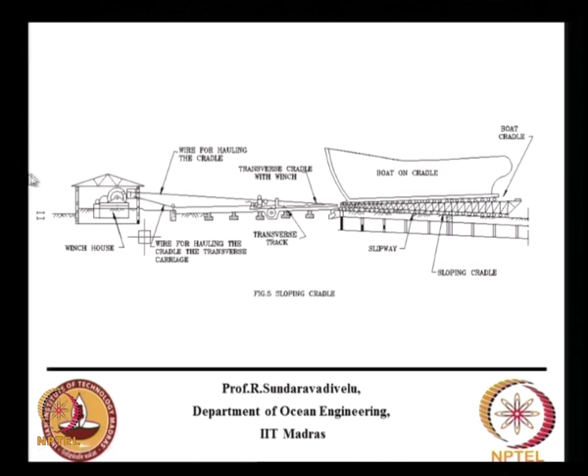Then we have a boat which is sitting on the cradle which will be pulled by winches from a winch house, and then it will be kept here, so from here it will either be transversed or kept at the same place for repair or maintenance. Sometimes they build the ship here then push it down like this.

Definition of slipway: this is also known as a marine railway. They are structures where floating vessels are hauled up for hull repairs. The slope varies from 1 in 12 to 1 in 24. So the slope is very important. A steeper slope means the hauling power required will be higher; a flatter slope means the distance required into the water is larger, that is the length of the slipway.

This is generally about 2.5 times the length of the largest vessel that is to be hauled. There are 2 types of slipways: end haul pattern and broadside or side haul pattern. In the end haul pattern, the ship is hauled lengthwise like this. In side haul, the ship is positioned sideways and hauled like this.

Similarly for ship lift also you will have an end ship lift, meaning they will raise the ship like this and then push it here, that is end haul. The broadside means they will lift the ship like this and then shift it like this. So both options are there in ship lift also, but the most commonly used is the end haul pattern.

This moves the ship lengthwise. A very elaborate carriage is required for an end on slipway. The vessel is required to be maintained in a level position. The carriage means nothing but the cradle.

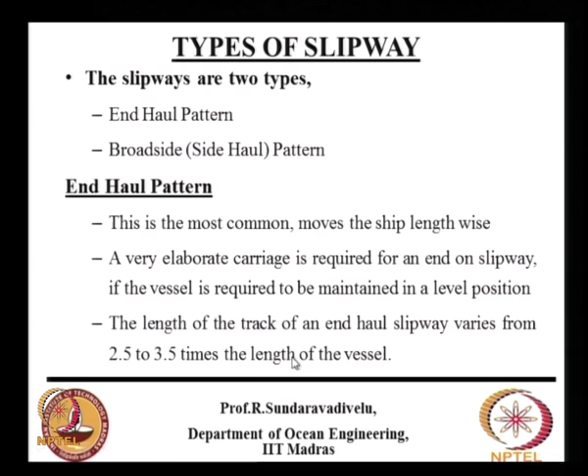The length of the track of an end haul slipway varies from 2.5 to 3.5 times the length of the vessel, that is the length required. The length required is higher because for one length of the vessel the ship will be in water, and for another length it will be on land, that is why we need a minimum of twice the length.

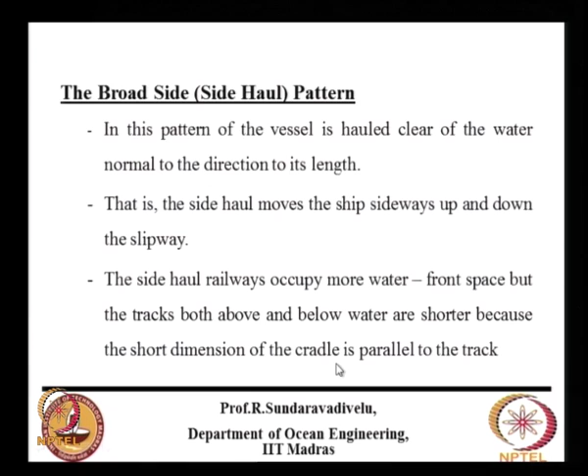In the broadside pattern, the vessel is hauled clear of water normal to the direction of its length, that is for the side haul it moves the ship sideways up and down the slipway. The side haul railways occupy more water front space, but the tracks both above and below water are shorter because the short dimension of the cradle is parallel to the track, that is the cradle width will be lesser.

The components of the slipway are these three main components: one is a sloping concrete platform, there is a cradle and roller, and then there is hauling machinery. These are the three main components for a slipway.

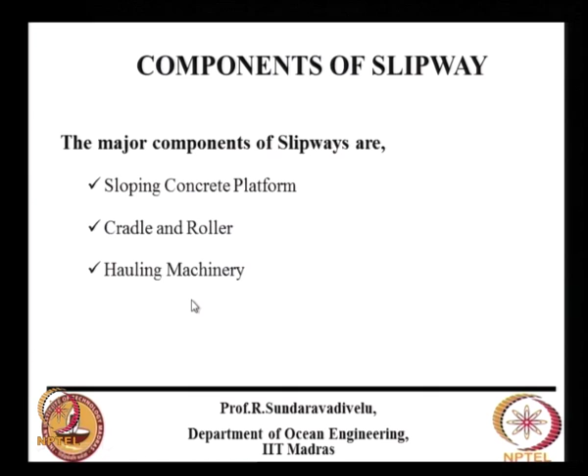This sloping platform supports the tracks on which the cradle travels. The track must extend sufficiently far into the water to permit the ship to float over the keel blocks on the cradle, and sufficiently far inshore to lift the ship entirely clear at high tide. That is, one ship length of slipway platform is required where the ship will float, but another length is required where the ship will rest on keel block and bilge block.

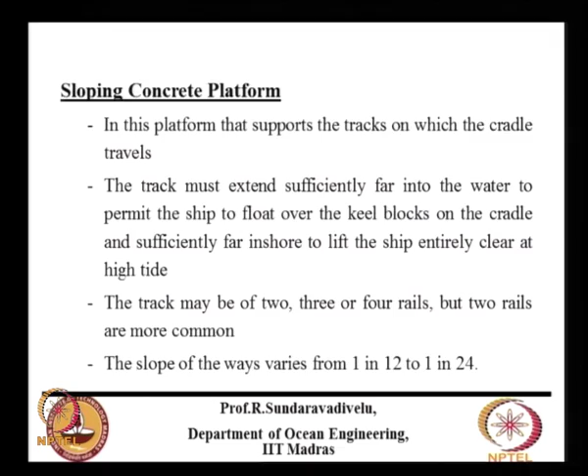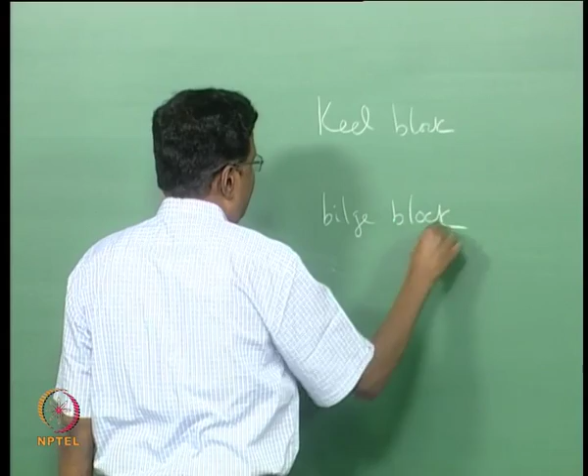We have two types of blocks which are used. One is called a keel block, another is called a bilge block. These are the two types of blocks that are required. Then we need what is known as a docking plan. These are the requirements for any slipway or dry dock or ship lift or floating dock. These are the three main requirements.

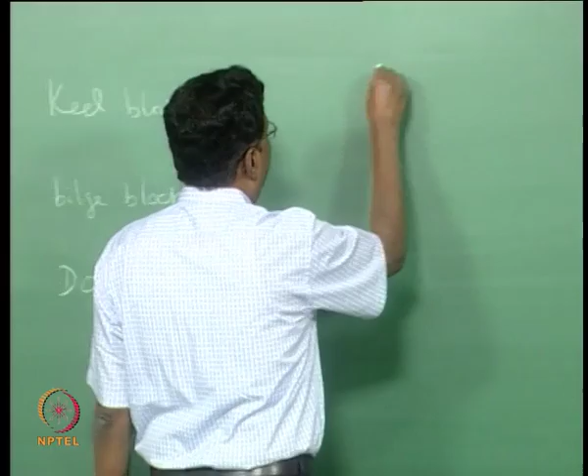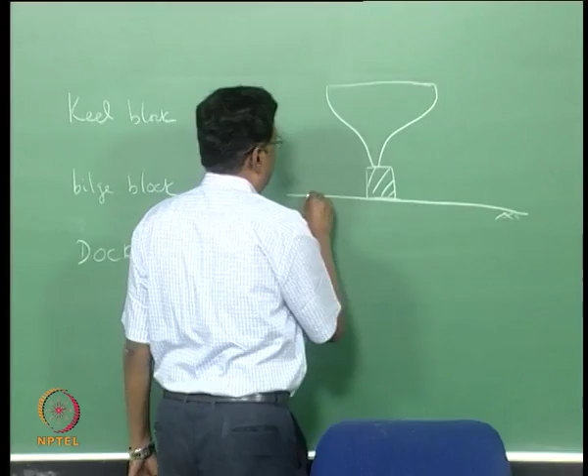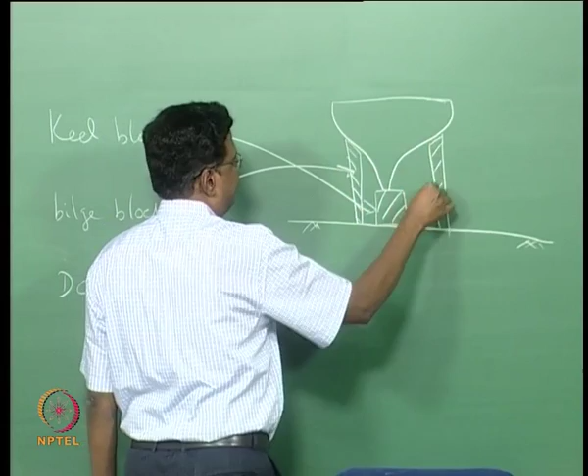Keel blocks and bilge blocks are something like this. So, when you have a block here to support the ship on the dock floor, this is called a keel block. The bilge blocks are to support the vessel at the sides, this is called a bilge block. This is a ship which has to be resting on the dry dock floor.

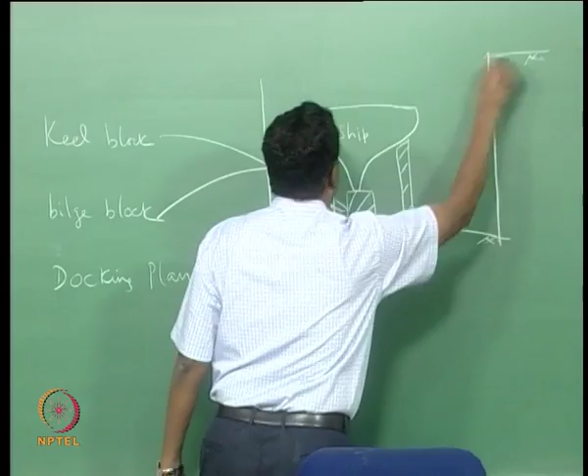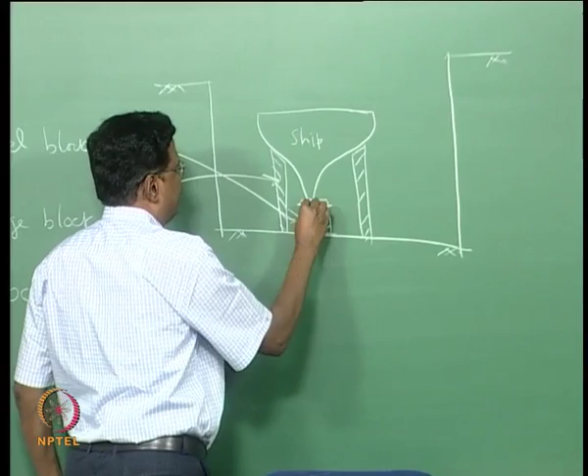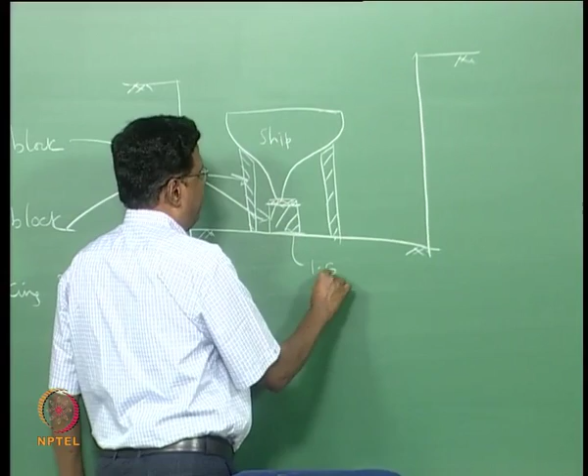If it is a dry dock or ship lift system, the systems will vary. Generally the ship will be resting on the dry dock; this will be the top level of the dry dock, this will be the bed level. You will have a keel block, it may be made of concrete, but generally you will have some wooden strips on top of this. Then to support the vessel at the sides we will have the bilge block. Docking plan means in the plan at what locations these keel blocks will be kept. The height of the keel block is generally about 1.5 meters, and these will be placed, depending on the size of the ship, maybe at 10 meters center to center or 5 meters center to center.

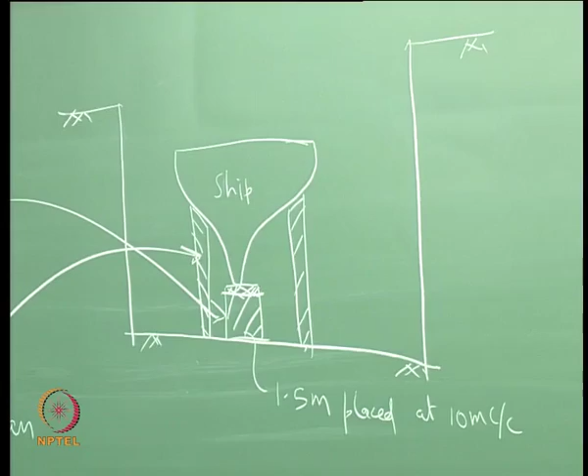We have been approached for one project to bring a used submarine near Mahabalipuram. Most probably it will be done in March or April. They will be spending about 2 crores or so. At that time, if it is convenient, I will take you there. They will bring the submarine from the sea to the land. It is there in Visakhapatnam. The Tamil Nadu Tourism Department wants to do a similar thing in Mahabalipuram, for which we are designing certain aspects. So, there also the docking plan is required. There they want to support at every 10 meters center to center. It varies from ship to ship; it is not at equal spacing, it will be at different spacing.

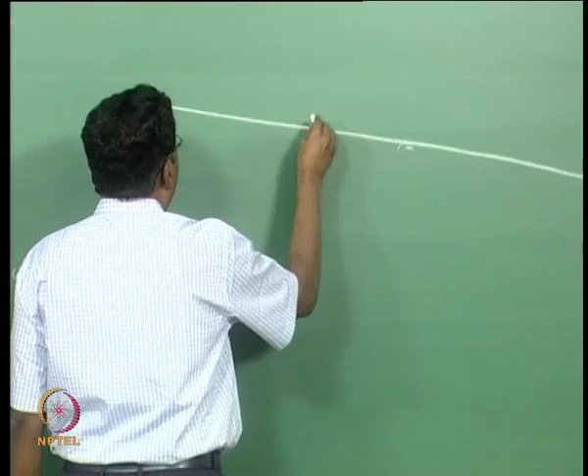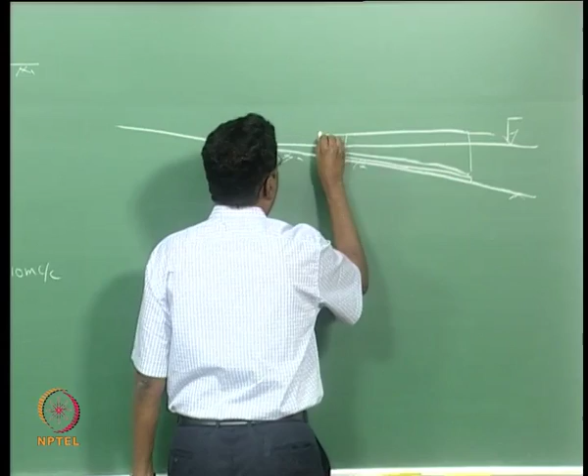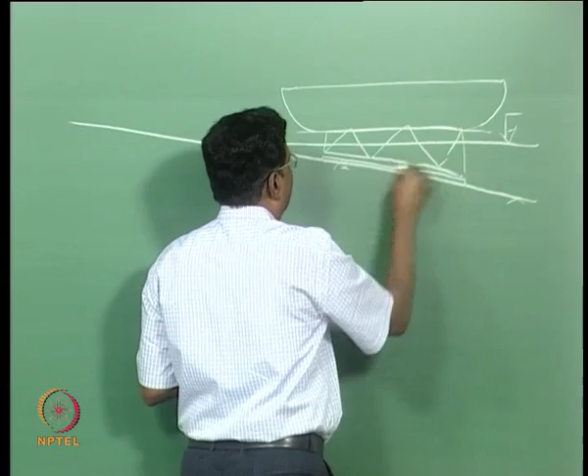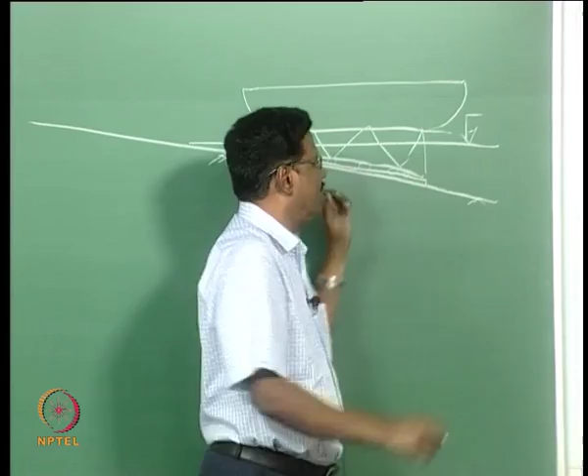The slope we are discussing: suppose this is your slope of the platform and this is your water level, then on top of this we will have a rail, over which you will have the cradle, and on top of it you will have the ship. So, the cradle has to move down; this is one position of the cradle, and it will be moving over rails like this. The ship will be somewhere far away from here where it will be floating. At that time they will lower the cradle, then ballast the ship onto the cradle, then they will push the cradle clear of water. This length goes further down like this, and you may have some piles supporting this sloping concrete platform.

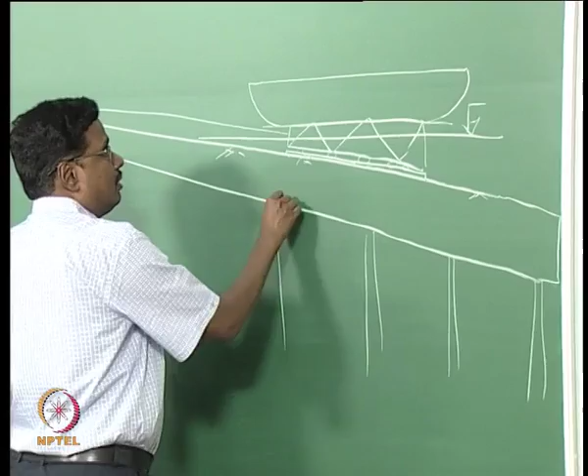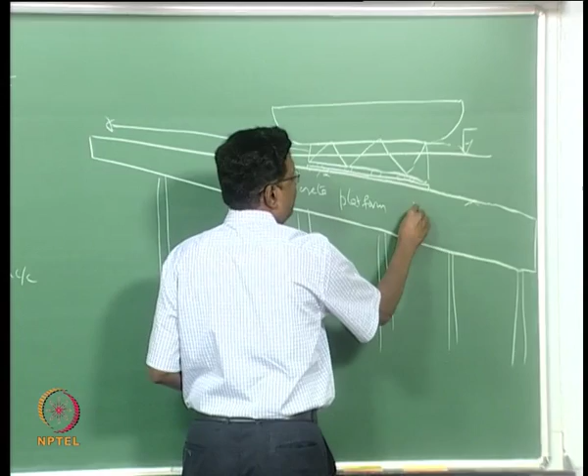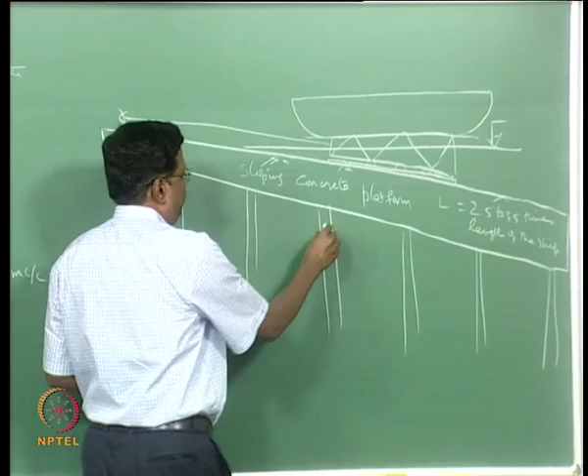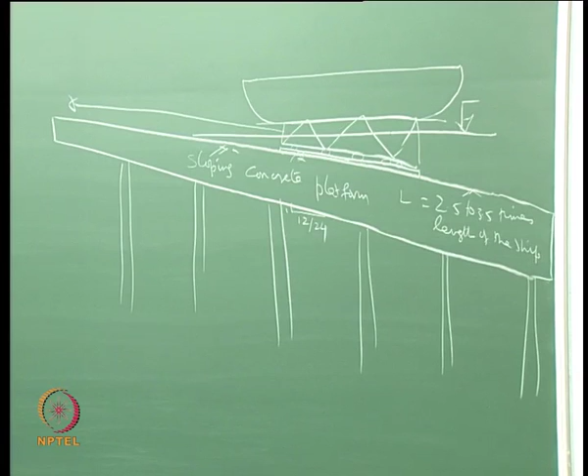So, this length should be 2 to 2.5 to 3.5 times the length of the ship. And this slope will vary from 1 in 12 to 1 in 24. The rails we are placing can be 2, 3 or 4 rails, minimum 2, sometimes they will have 4 rails also, over which the cradle will move. The cradle is a steel structure which supports this platform. There are different types of cradle.

There are different types of slopes: one is inclined side slipping, another is on an acute vertical curve, the third one is on a flat curve. Then we will have a cradle and trolley system, synchro lift we will discuss later, then they will have a tilting bridge, then they will have a transfer track. These are all different types of platform arrangements.

The cradle and roller: this is a framework of timber or iron or keel blocks, but usually consisting keel block is much stronger than the other two. They can have a cradle with the keel block also. The main deck of the cradle provides a working platform for the repairing and painting of the vessel.

So, when they take the ship with the cradle, they will keep the ship in the cradle itself. So, each ship will have a separate cradle. So, they will take it along with the cradle, repair it and then push it down to the sea. So, each ship when they want to repair, they will have a specific cradle for that.

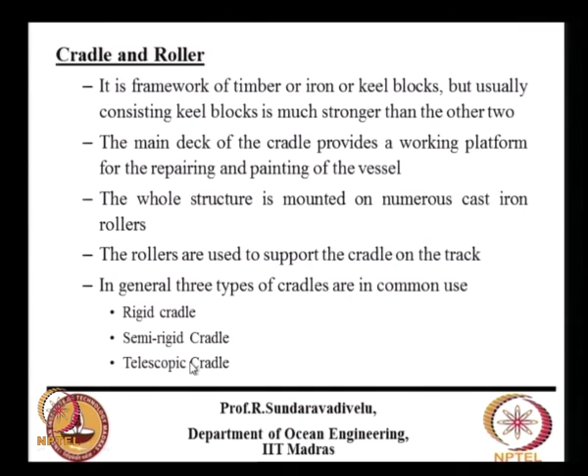The structure is mounted on numerous cast iron rollers. The rollers are used to support the cradle on the track. There are 3 types of cradle: one is a rigid cradle, semi rigid and telescopic. Semi rigid means it is flexible, telescopic means they will increase the length of the cradle depending on the length of the vessel.

This shows a conventional ship repair. This is not a ship, this is for a floating vessel. This is in a place called Dhamra in Orissa. So, here you are seeing the 2 rails, I think these are the 2 rails, this is another structure, this is what I am talking about, the cradle, this is the keel portion of the vessel. They will be pushing; this is a very simple structure because this is a very small boat facility.

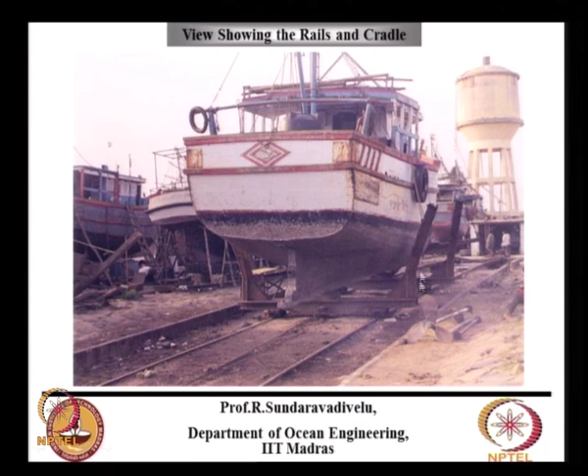The hauling machinery consists of wire rope drums or chain sprockets, endless chain running over a number of sheaves and the operating motor with a gear train. Then we also use electrically driven variable speed gear comprising of a pump and a hydraulic motor with oil as a medium. Side haul railway have one chain or rope for each section of the cradle. When you do a side haul railway, there will be many cradles because the length of the ship is more, each one will have a separate hauling system.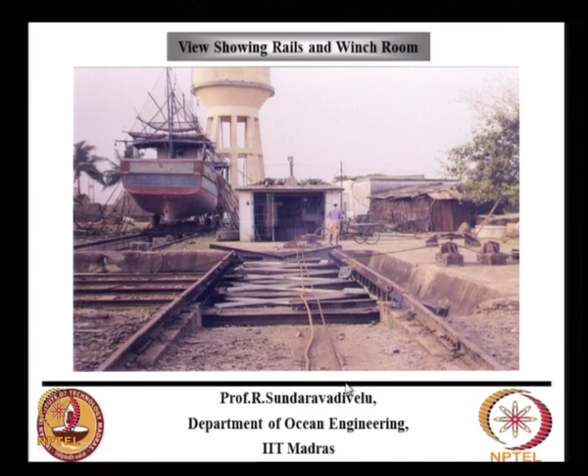I have a video showing the ship lift where these operations are given. This will go to the other end below the water where they will be doing this. This is one typical system where the transfer cradle is used. So, this is the main slipway, this is the river, this is land area, there is a winch house here, they push the vessel here like this, then they transfer it like this right up to the end. We have the tracks on either side of this transfer track and these are called the repair tracks, this they want to do in future.

So, the advantage of this type of thing is you haul the vessel at any time and go to any of these repair tracks. Suppose this vessel is ready, then you bring it here, then push it back like this and then take it here like this. Typically what they do is the wheels will rotate 360 degrees. I will show you in the ship lift video how they are shifting, then only you can transfer it like this.

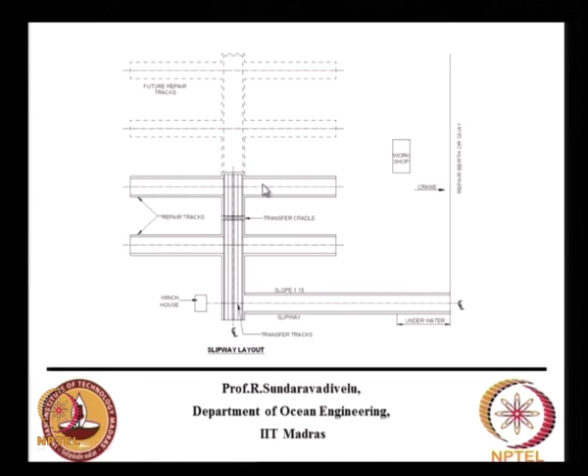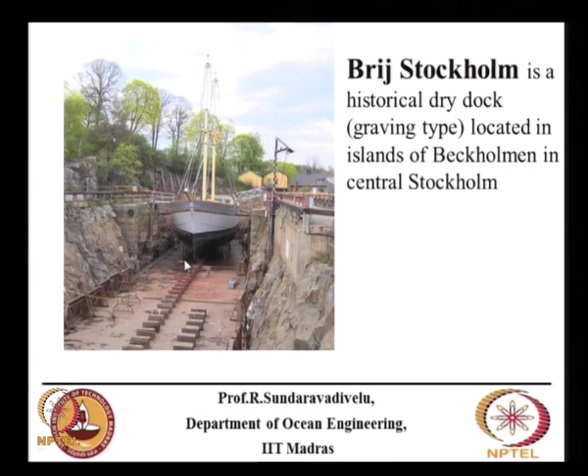So once they close the gate, then pump the water inside, keep the water level same, then they remove the gate and then take the vessel out. When they bring the vessel in, they close the gate, pump the water out. So a gate is required for a dry dock. The narrow basin or vessel is flooded to allow a load to float inside, then drained to allow the load to come to rest on a dry platform. That is, first allow the vessel inside with water inside, then remove the water.

This can be used for construction, maintenance and repair of ships, boats and other watercraft. There is a regulation that once in 5 years the under keel of the ship has to be checked. For that reason we have to dry dock the vessel once in 5 years and you have to do some coating, anti-corrosive and anti-biofouling coating. If the biofouling is there, the ship resistance will be higher, fuel consumption will be very high, that is why we have to remove the marine biofouling also.

Sometimes for construction of bridges, dams and other large objects we use the dry dock. At present there is a construction going on of a seawater intake well for the Hinduja project at Vizag, for which the intake well is built inside a dry dock, and one of the large dams in the Netherlands they have done in a dry dock.

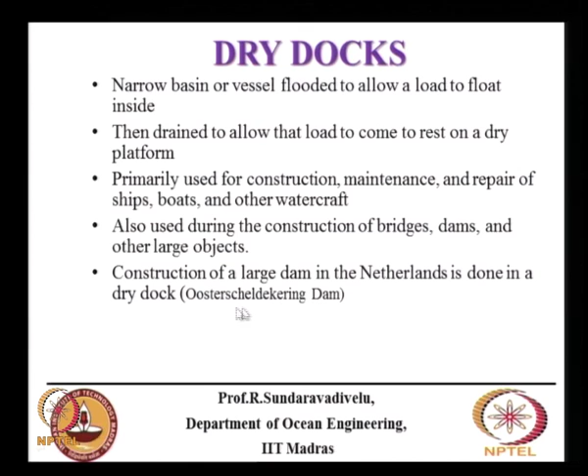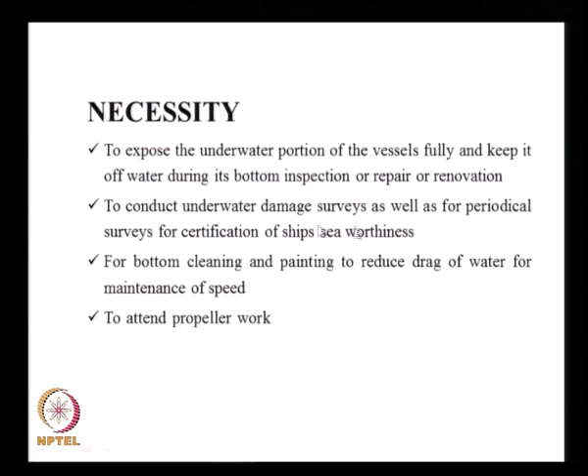What is the necessity for a dry dock? This is to expose the underwater portion of the vessel fully and keep it off water during its bottom inspection or repair or renovation. Sometimes certain renovations are required in the vessel, for that also we have to dry dock. You have to carry out the underwater damage survey, if any damage has taken place, as well as periodical surveys and certification. So we have to certify seaworthiness of the vessel once in 5 years. For bottom cleaning and painting to reduce drag of water, for maintenance of speed, to attend to the propeller work. For these reasons we need the dry dock.

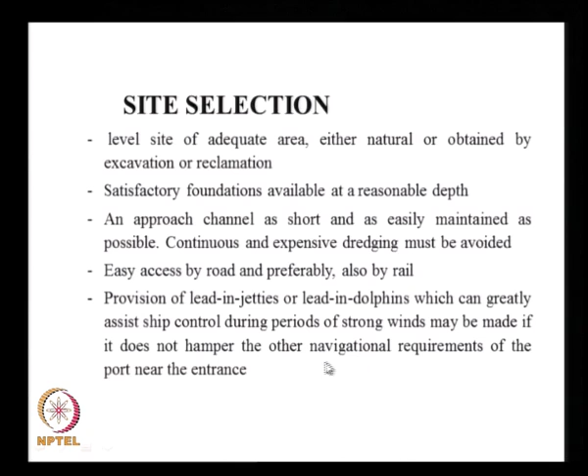So site selection is very important, and satisfactory foundations at reasonable depth should be available. A short approach channel is preferred. Dredging, both capital and maintenance, should be as minimum as possible. There should be easy access to road as well as rail. We have to provide some lead-in jetties, lead-in dolphins, which can greatly assist ship control during periods of strong winds and other navigational requirements. These are the requirements for a dry dock.

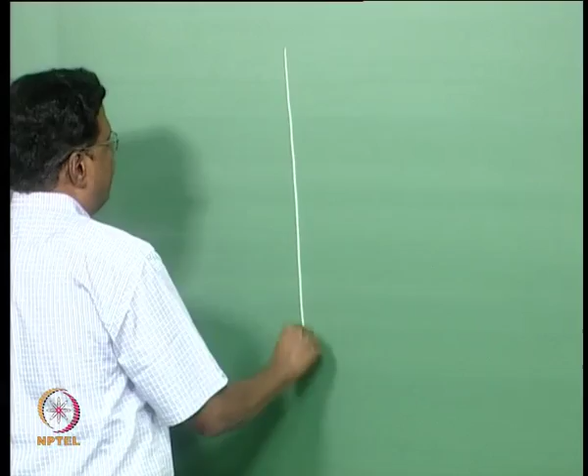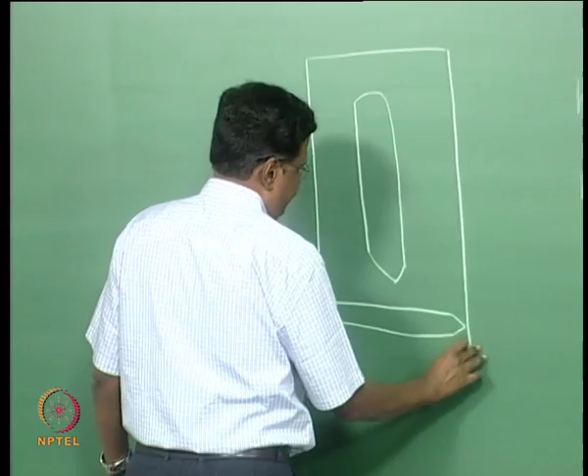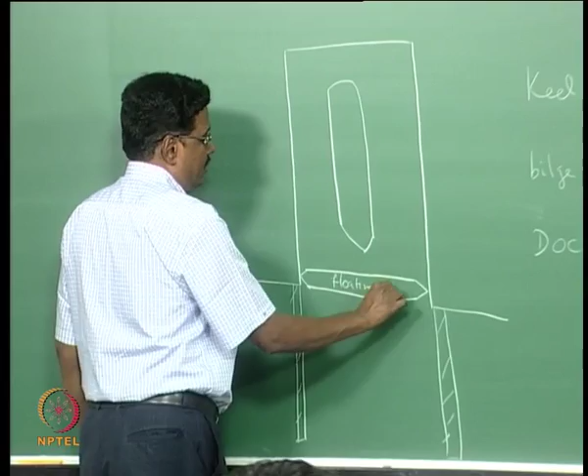I am drawing the plan of the dry dock. So the vessel will be kept here like this. This is the plan of the vessel. Then we have a gate, the gate is like this. What they are asking is a lead-in jetty, there is a jetty here, on both the sides also it will be placed. There are different types of gate, this is called a floating gate. When they ballast, the gate will go and sit here. So this is the cross section, and if you see the longitudinal section,

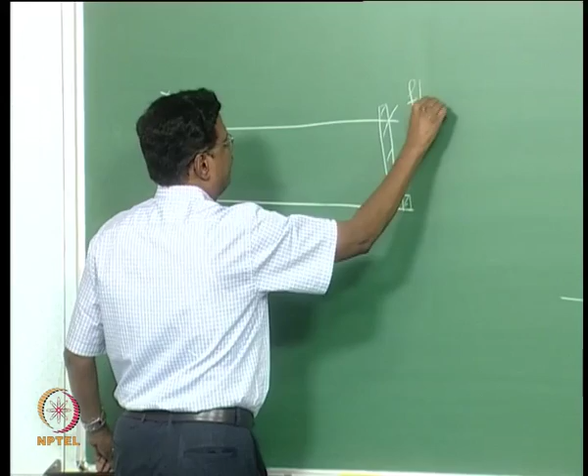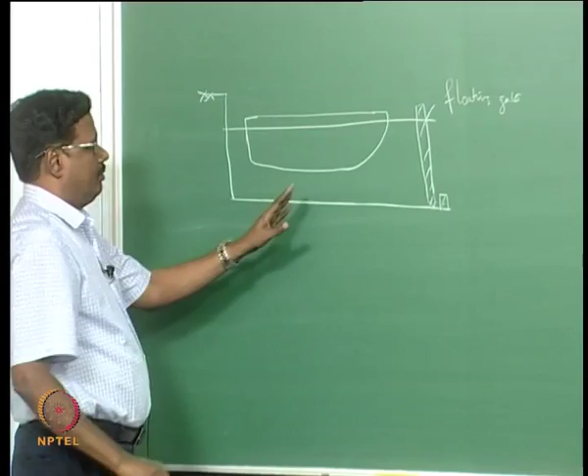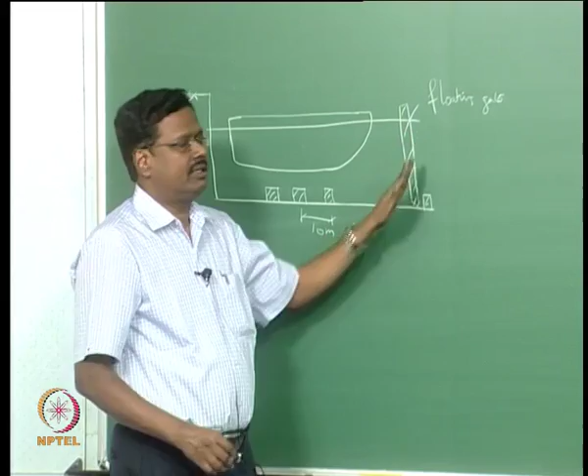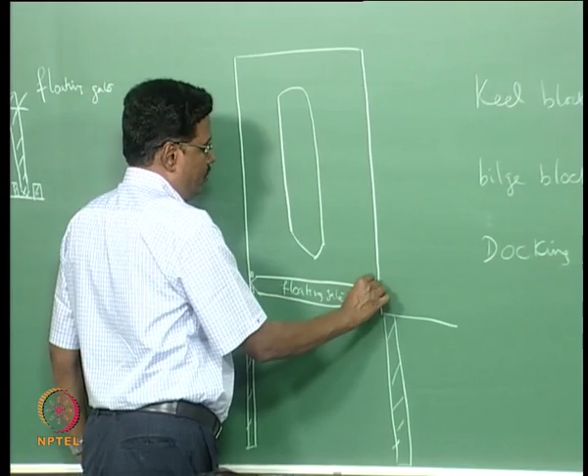So, when the gate is not there, they will bring the vessel inside, then they will position the gate, then they will remove the water, then the vessel will go and rest on the keel blocks. These keel blocks, I said the typical spacing will be about 10 meter in this direction. So this will rest here, they will remove the water. This floating gate will have end grooves here where it will go and rest, so the gate will not move outside. There will be a pressure from this side when the dock is empty. You have to design for this.

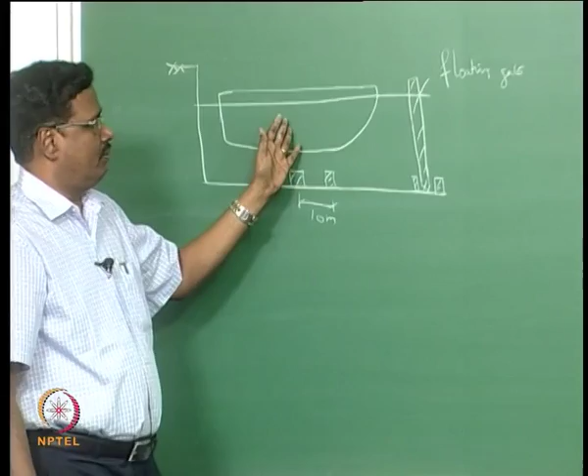Once the repair is over, then they will allow the water inside. There will be some valves here which they open, then the water will enter from outside to inside. When the water level is same on both the sides, then they will float the gate and take it to the sides.

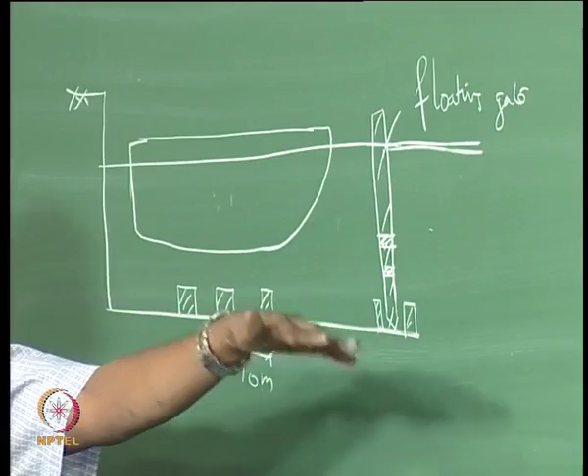Do not talk, yeah, hello, do not unnecessarily talk.

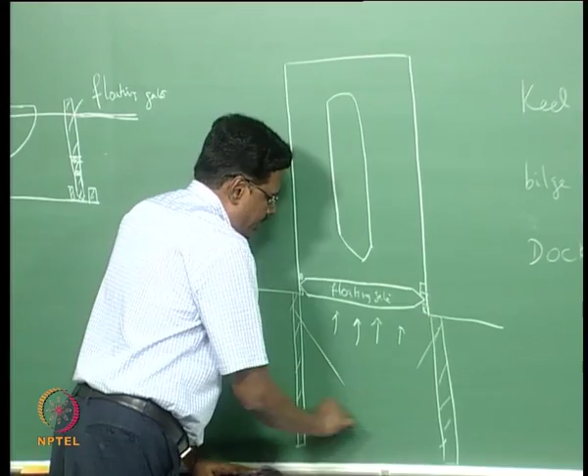They remove the floating gate and put it by the side here. To bring the vessel inside, when the vessel is somewhere here, they will have some guide from here, so that they can bring the vessel inside correctly into position. They will take the vessel like this and then bring it inside. This is the operation for the dry dock. It is a very complex dock. Ship weight is very high. The ship weight must be spread evenly on the dock floor.

Hello, who is talking there? Do not talk.

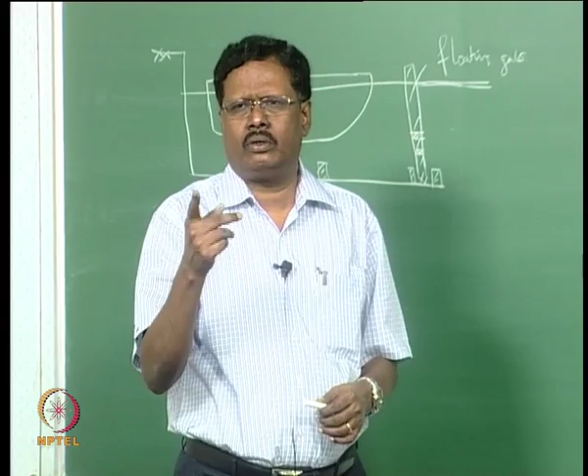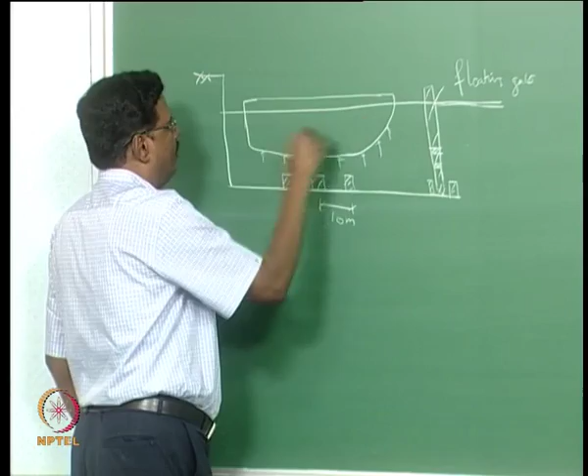When a ship floats, the pressure holding the ship afloat is spread throughout the entire underwater hull, uniformly, but when it is docked on the dry dock floor, it is at intermediate spacing, on the keel blocks. There will be some transducers, irregularities like flare at the bow, they have to be taken care of. The bow portion cannot be supported. There may be some openings at the bottom, especially for nuclear submarines. There may be some locations where you cannot support. Whenever a ship is designed, the dry dock plan also is given along with the ship. Each ship will have a different plan.

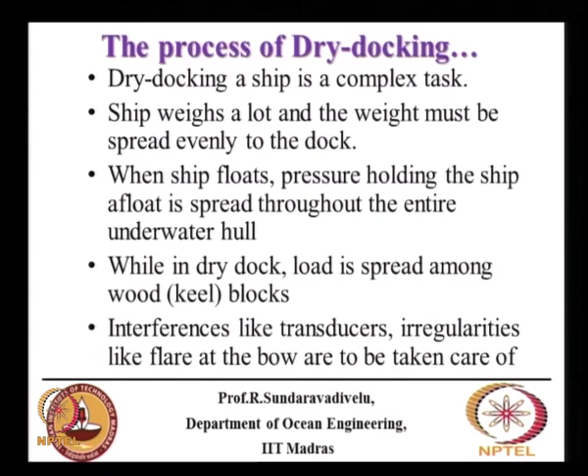So, it should accommodate the characteristics of the ship bottom and the weight distribution. Weight distribution of the ship is not uniform. Each ship carries a docking plan specifying location of blocks, angle of side blocks and their height. The angle at which it has to be supported is given, and where it is to be supported is also given. The position of transducers, sea chests, tail shafts and other items is also marked on the dry dock plan. You should not have a keel block at these locations, otherwise this will damage the costly equipment.

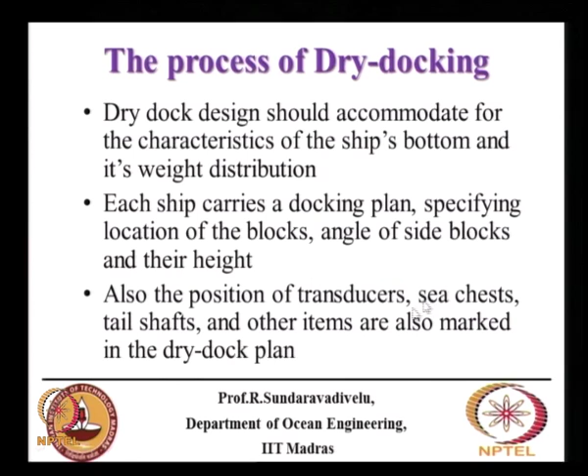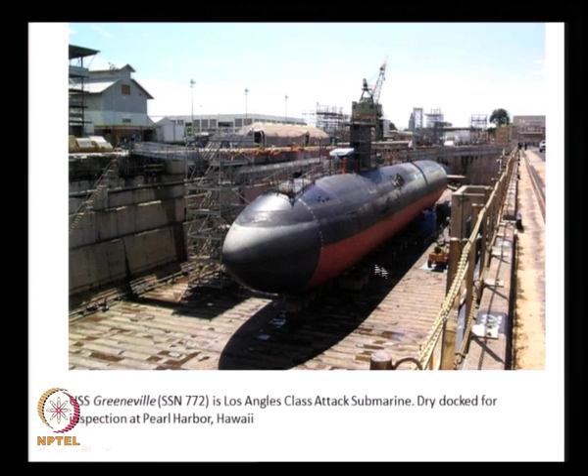This photograph shows an atomic submarine. You can see the space that is given here on either side of it. This is a dry dock. There are some cranes here which will lift some of the components from this side. There is a staging given here, so that you can access any part of the submarine. Typically the height is about 1.5 meters, so somebody can go below and do the work also.

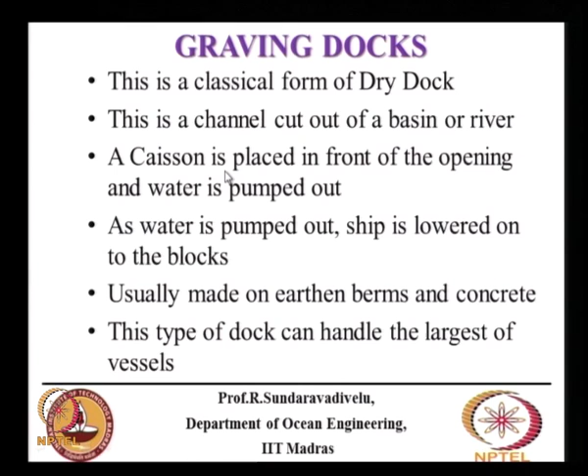There is what is known as a graving dock. This is a classical form of dry dock. You cut a channel from the basin or river, a caisson is placed in front of the opening and water is pumped out. As the water is pumped out, the ship is lowered on the blocks, usually made on earthen berms and concrete. This type of dock can handle the largest of vessels. So, typically you cut a channel and put a block between the channel and the river by a caisson. This can be a floating caisson which will arrest the water, and side slopes and side structures are not required.

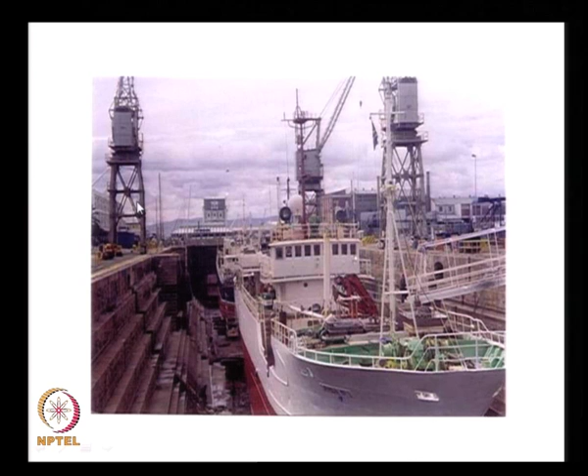So, one of the dry docks in South Africa, Cape Town, is made of stone, all these faces. So, they have put a stepped stone here. The Bombay dry dock is also something like this. This is the crane which is used to lift the structure from here.

In olden days the dry docks were built like the shape of the ship. This shape was advantageous because the dock was easier to build, easier to side support the ships, and less water had to be pumped out. But modern dry docks are box shaped as I have drawn here.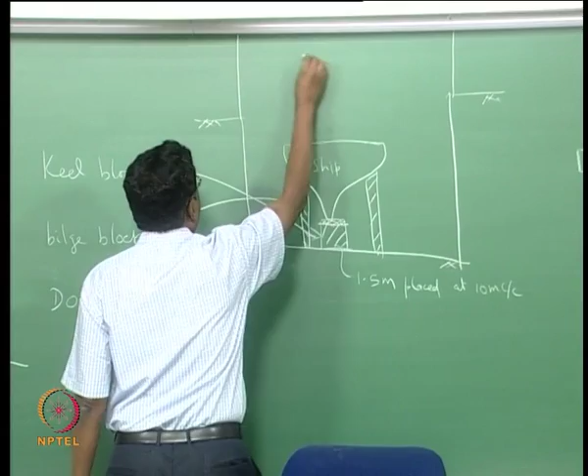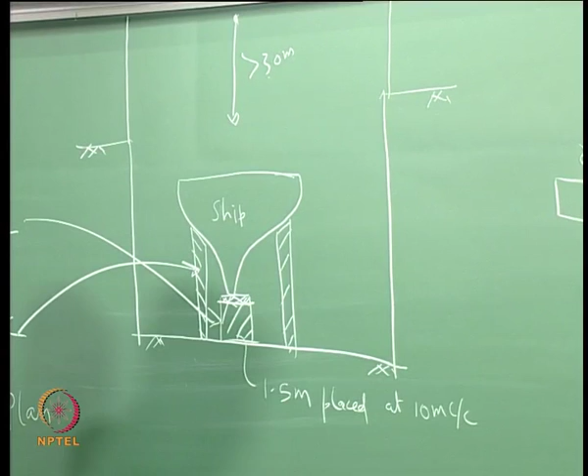We use covered dry docks for navy vessels. It is mainly done to prevent spy satellites from taking pictures of the dry dock and any ships or submarines in it. Typically they put a roof over this. This is not simple because the height required is more than about 30 meters, about a 10-story building, because some of the nuclear submarines have antennas, so they should not come and hit. So that is why they need these dry docks. I told you there is a plan to build a tunnel to take the submarines inside land to a far away place; it is also being done.

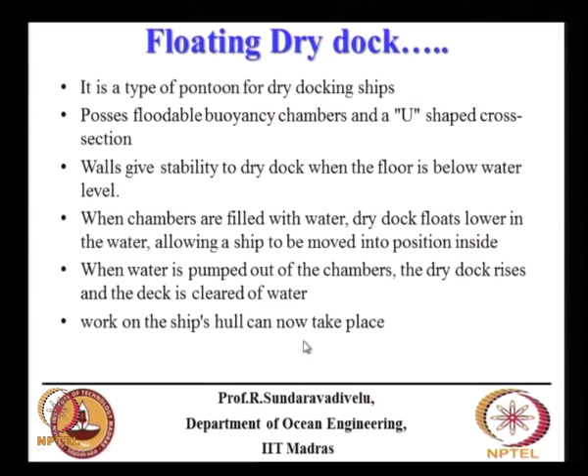So it is a type of pontoon for dry docking ships. The chamber shape is typically U shape. These walls give stability to the dry dock when the floor is below the water level. When the side chambers are filled with water, the dry dock floats lower in the water, allowing a ship to be moved into position inside. When the water is pumped out of the chambers, the dry dock rises and the deck is cleared of water. Work on the ship hull can now take place. This is the general principle.

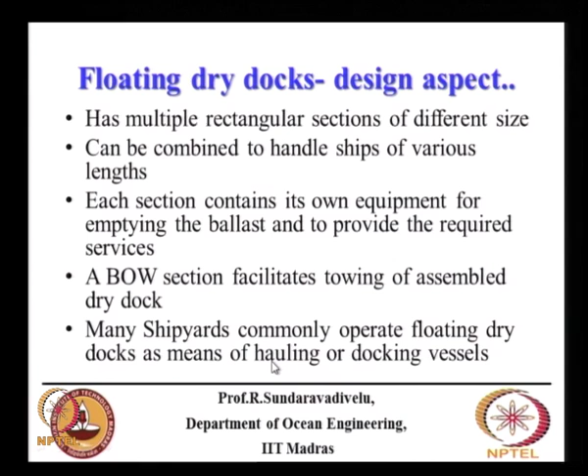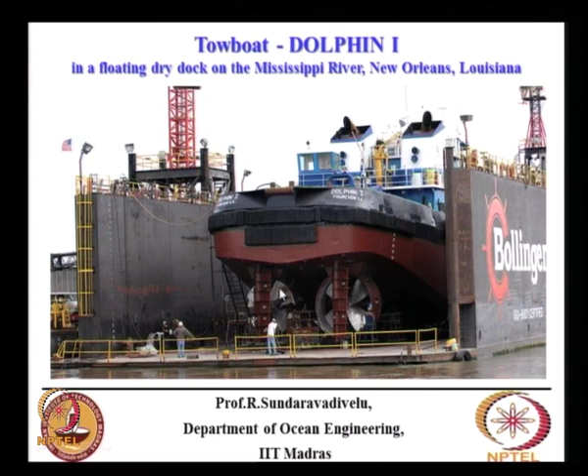One of the advantages, the floating dock can be towed anywhere in the world. We can sell it as a second hand item. It can be used to provide maintenance in remote locations. That is what we need at Port Blair, where we have this floating dock. Can be ballasted to lift a damaged ship with an excessive list or trim.

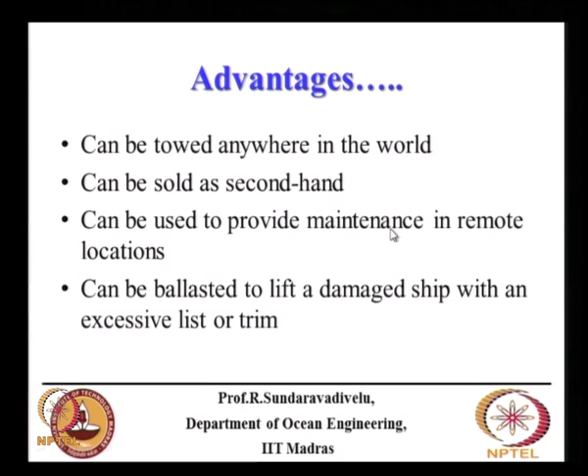It can be used when there is a vessel which is tilted, which is damaged, then you can take the floating dock there and do the mechanism of lifting it above the water for a damaged vessel.

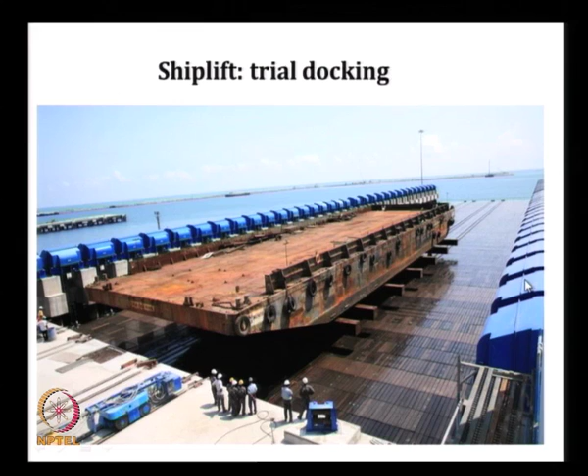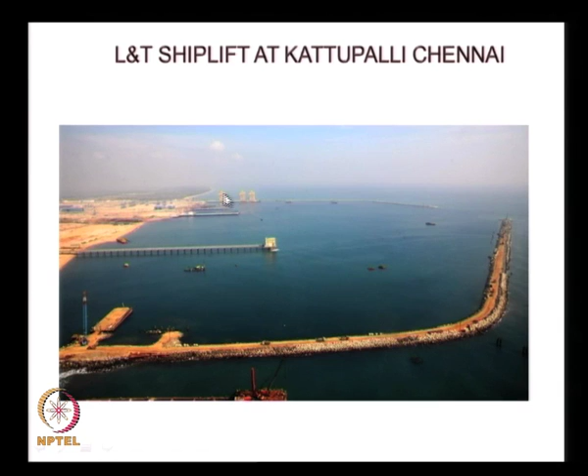This shows the layout of the breakwaters. This is the north breakwater, this is the south breakwater, this is the container facility, this is the ship lift facility, these are the other structures. Total area is 1225 acres, the whole area. This is called as modular fabrication facility, that is MFF, that is 100 acres. They have developed the land of 35 acres with a very strong foundation.

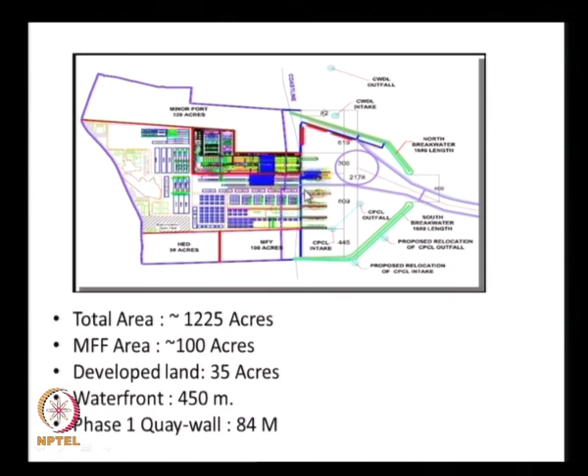The waterfront required is about 450 meters. In phase 1 they have built one quay wall also somewhere here. This can handle ships of size 260 meter by 46 meter. The light ship weight will be about 23,000 tons.

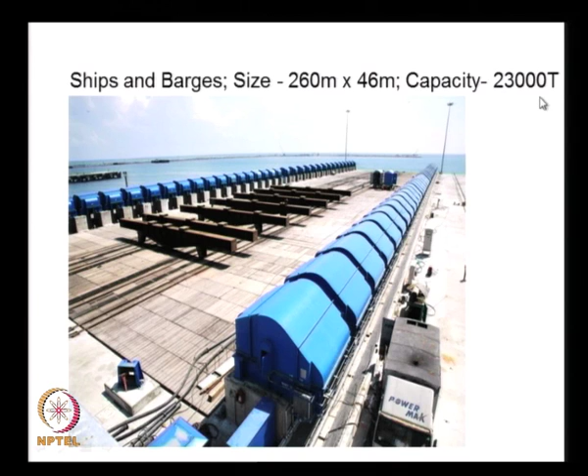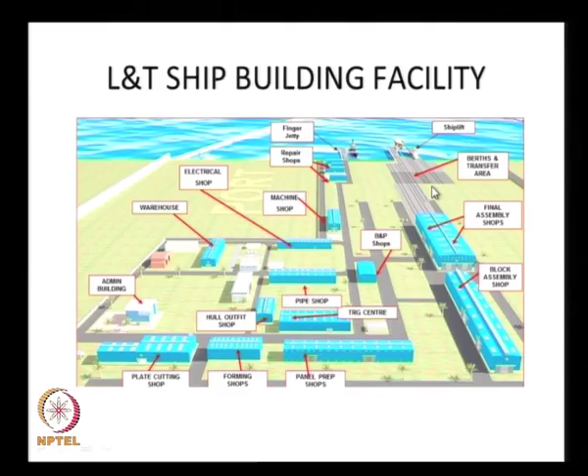This shows the aerial view of the ship lift facility, where we have the ship lift here, the transfer berths, these are the winches, then you can bring it back here, then you can go this side, you can take it back or forward, you can keep 3-4 ships, or you can go this side also, and these are the various facilities which are planned. From here it will go to the block assembly, from here you can bring the vessel also.

So, either you bring the vessel from inside and do the repair, or get the plates from here, from there you make the modules and then assemble the ship here, then take it back here and then bring it to the ship lift, lower the ship lift and take it for trials, check the ship for all the parameters. If it is all right, then you can sail it. If there are any problems, then you can again bring it, do the repair, then again bring it back. So, some 2-3 trials are required for the ship before it is sailing out.